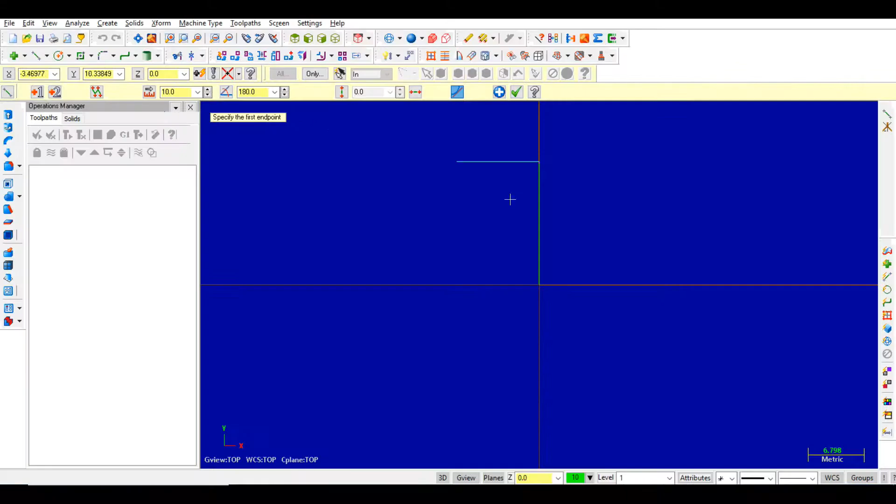So again take here from first point of line, length 7. Next distance is 20 in horizontal direction. Then here diameter for this groove is 40, so take from 44 to 40 radially, 2 mm distance.

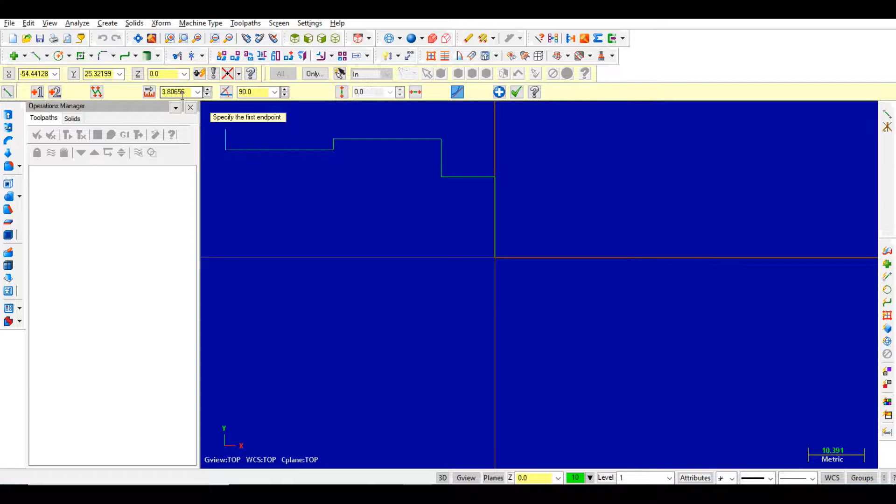Next again 20 mm horizontal direction. Then again up to diameter 50. Click on the last point of previous line and vertical line, give the length 5. Again here 10 distance, length is 10. Okay, complete this command.

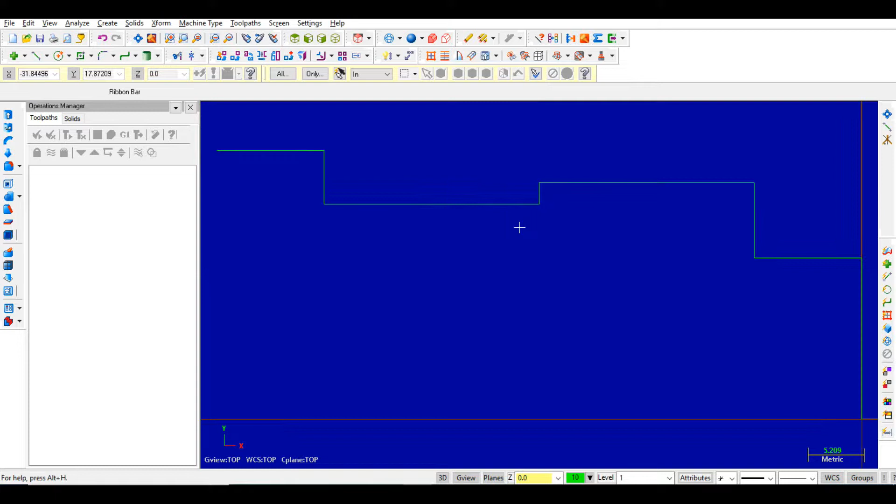Now this is the geometry. Here what I need to add is chamfer and fillets. This is the fillet and all chamfers are 2 mm by 45 degrees. First, I will draw here fillet with radius 2.

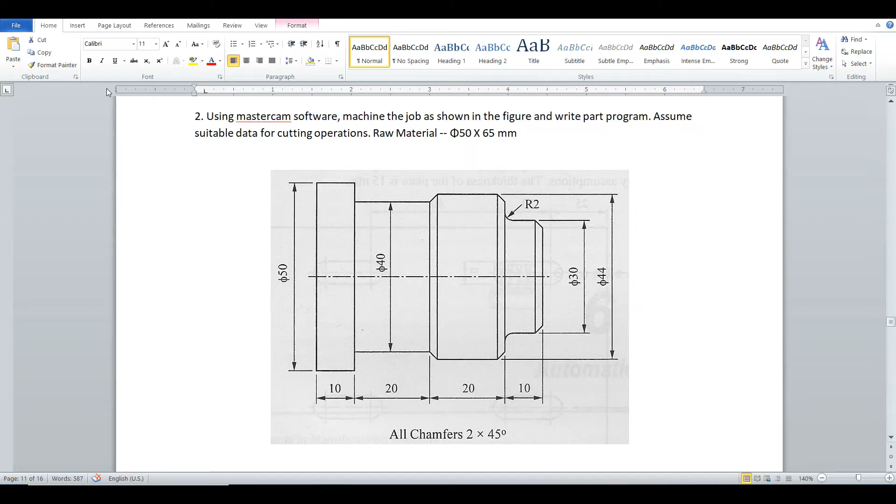Escape. Go to chamfer command now. Your chamfer distance is 2 and angle 45 means in x and y direction, all the two directions, chamfer distance is 2 mm.

So this is the complete geometry. Complete this command. We have considered only, see here, this 20 distance from this point up to the last. Now these vertical lines also I can draw to close the geometry, but it is okay to keep it half geometry.

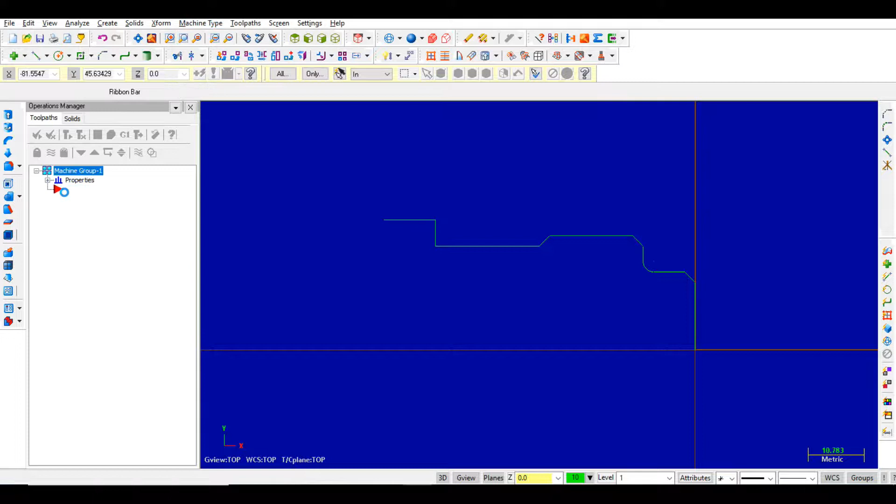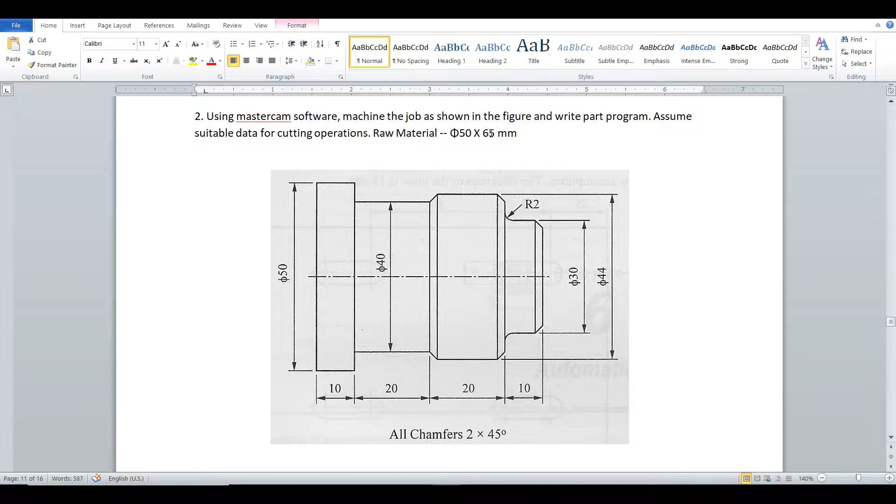Now machine type, I will select lathe and go to stock setup. It should be 65 mm length extra and diameter is 50.

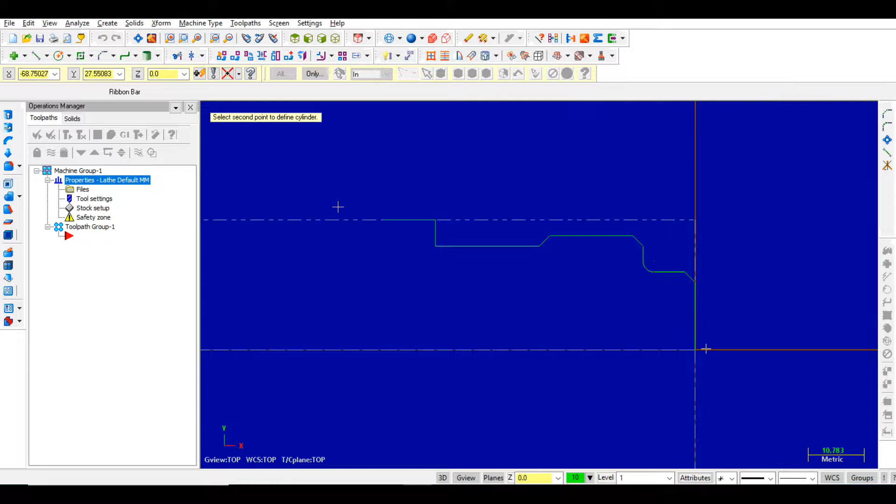Go to properties in stock. I can use margin command to add the distances as per my requirement, or I can randomly use make from 2 points - this is start point of geometry and this is end point. So here I will click slightly right side of the first point, leftward, and upward side to the last point, on the left side and slightly upward. Check the preview, so this will be the raw material.

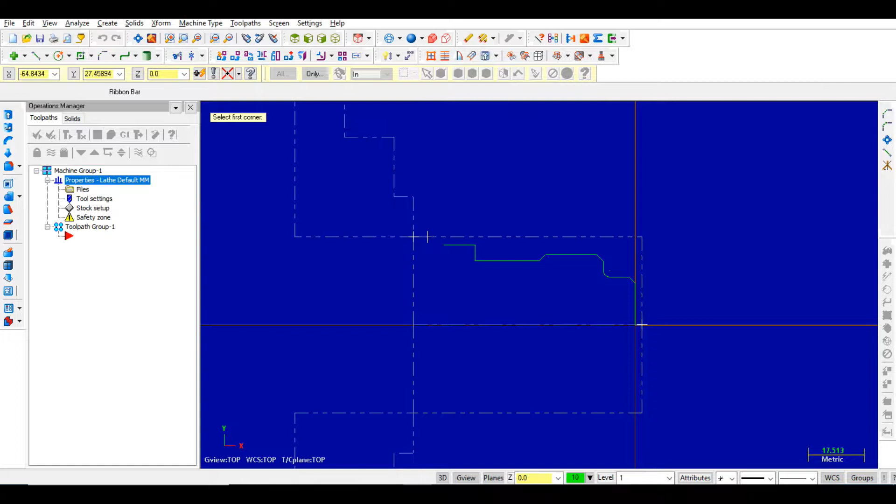Just okay, then chuck jaw. So here this type of chuck, and I can use here from stock and directly give the grip length, or just untick this and we can use make from 2 points. This is last point of geometry and last point of raw material. Between these two, I will select first point of the particular chuck and last point here. Okay, so like this will be the chuck.

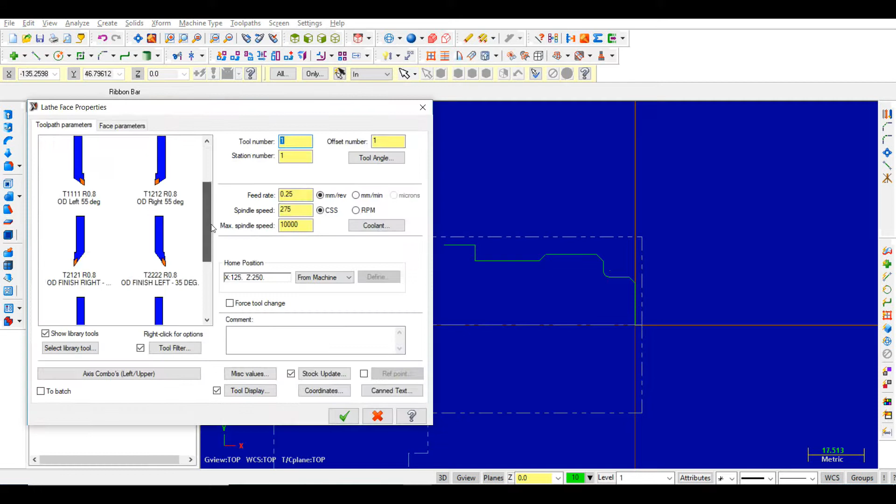So this is the stock setup for raw material and chuck. Will start - go to tool path and face. Any name, you can give the name for facing operation. Here I will select the tool for facing operation. This one is the tool. Click OK.

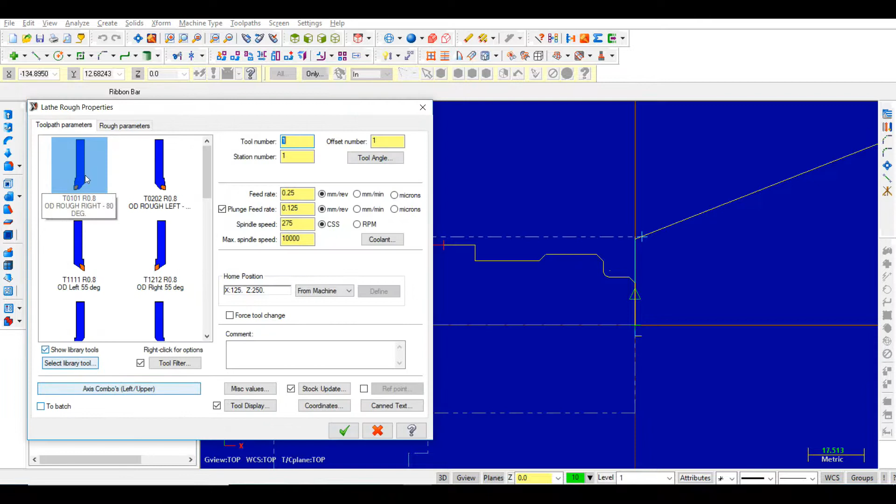Then next, rough turning for material removal. Select chain and click on the first line, so it will indicate starting point by green and end point of the geometry by red. This is the tool I will select for rough turning. Click OK.

So this is rough turning, material removal, but here this groove is not machined. You can check in animation - all the material is removed, but the groove operation is not done. So for that,

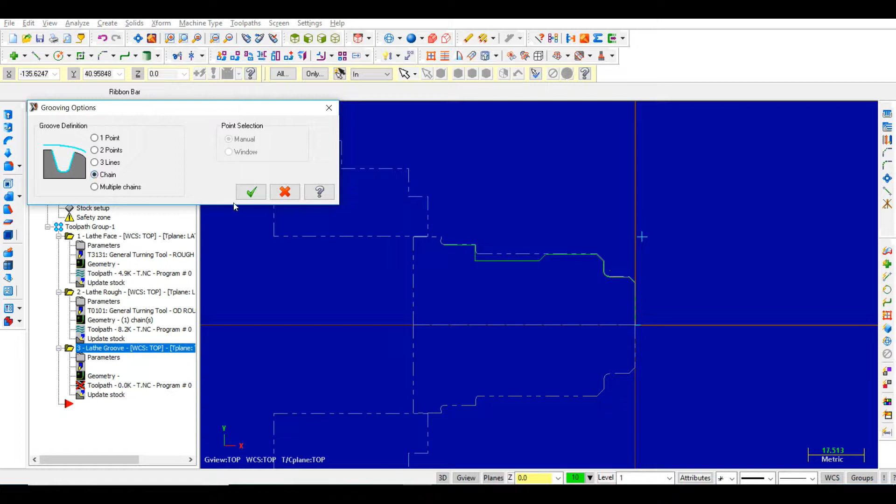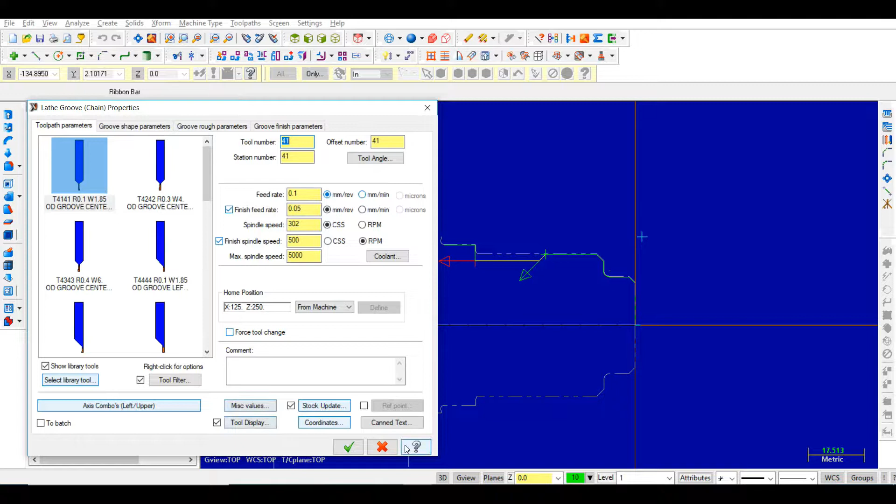just hide this tool path and then next, groove operation. I will use here chain option for this one. Click OK, and first line - it will show the first point of groove and last point here I will select, or line, and it will show the last point of the groove. This tool I am selecting here for the groove command, and here are feed rate and other parameters. As per the actual machining operation, we have to select this. Like this, grooving operation will be performed.

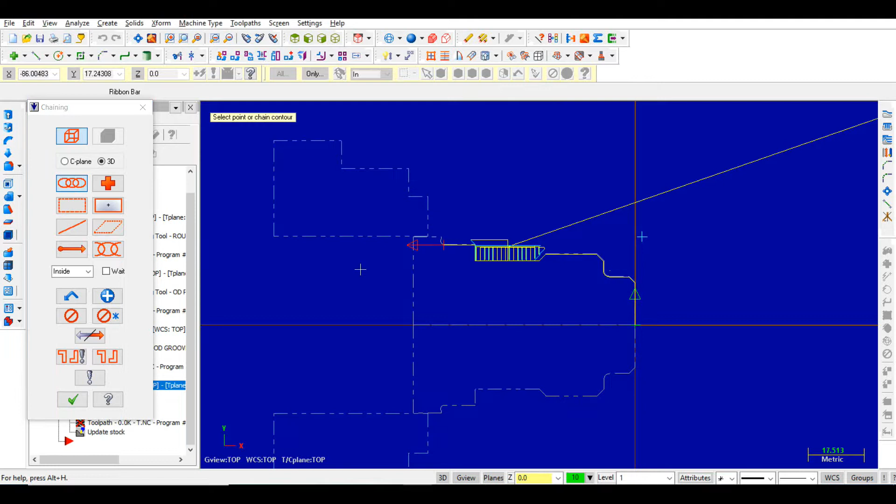Then next, first we will finish all the operations. Go to tool path and finish. Again chain and select the geometry. For this geometry, for finishing, I will select here this tool for finish turning operation. Okay, so it will have a finish cut.

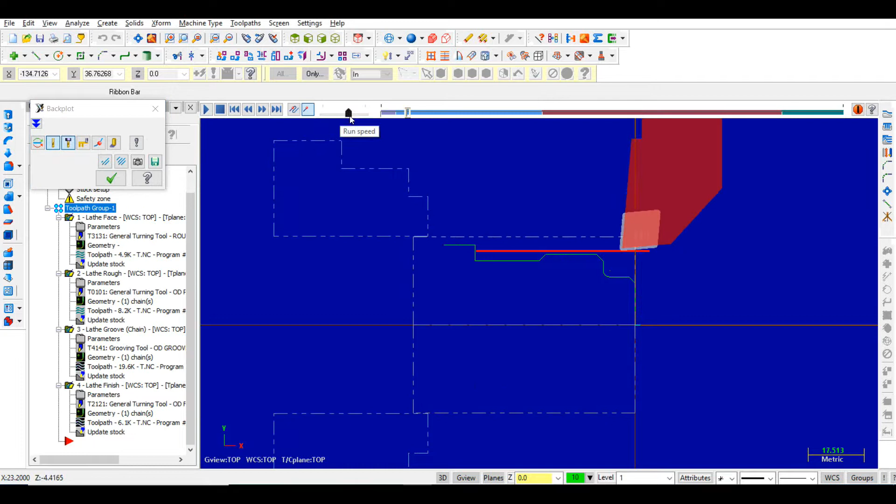Then select all the tool and check backplot option. Here, just speed it up, and it will show the tool path, grooving operation, and then finish cut like this. Then see the animation, make it isometric. Here all the operations are

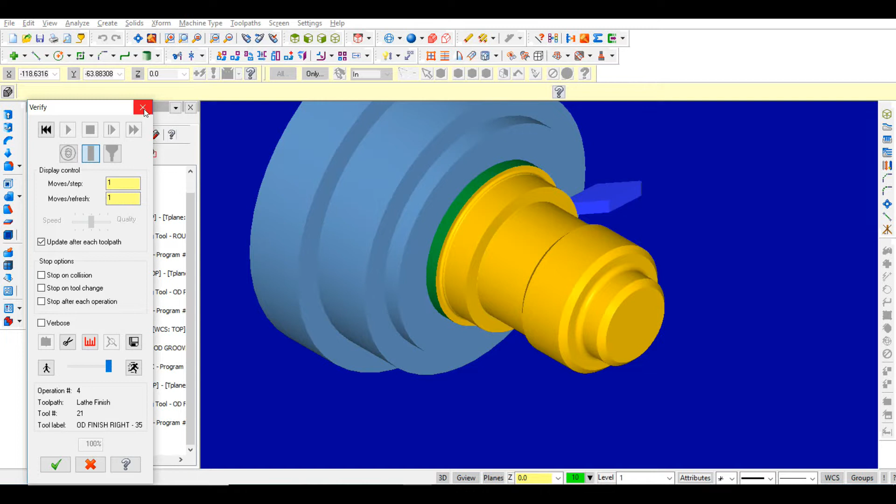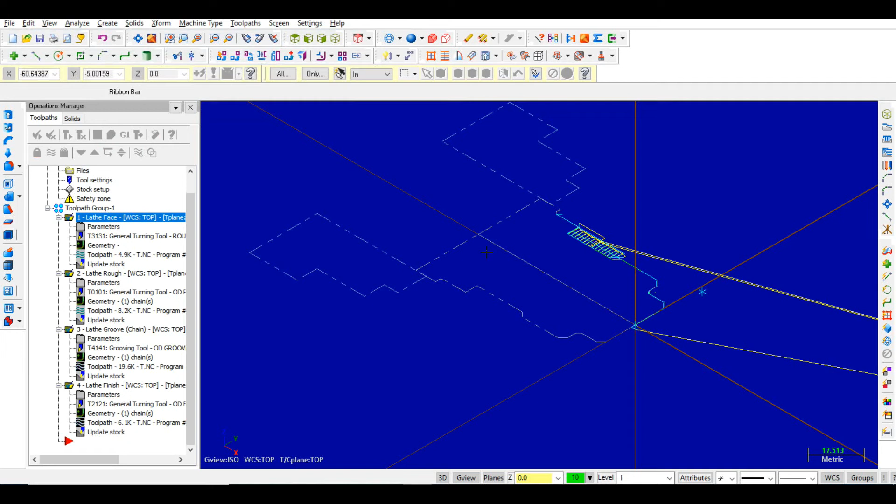done, complete. Now just we'll use this command G1 to generate NC code for all the operations. Just save this file and replace them - I am replacing the previous file here, and it will generate the G code and M code as visible in this particular file.